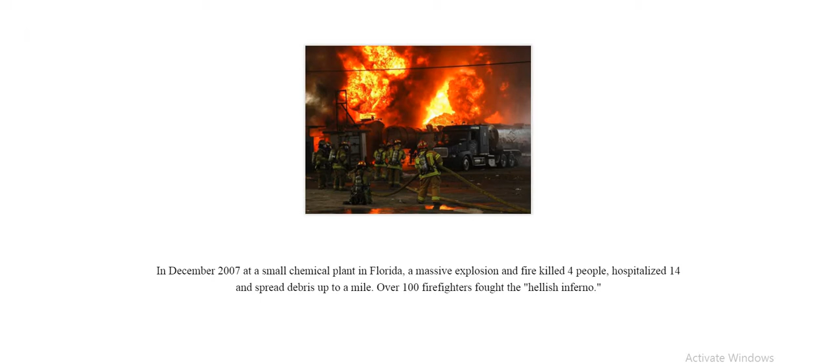In December 2007, at a small chemical plant in Florida, a massive explosion and fire killed 4 people, hospitalized 14, and spread debris up to a mile. Over 100 firefighters fought the hellish inferno.

On February 16, 2007, a massive fire broke out at a refinery in Texas, leaving 3 workers seriously burned and 11 with minor injuries.

In April 2010, an explosion on the drilling rig off the Louisiana coast killed 11 workers, injured 16 others, and caused a massive offshore oil spill in the Gulf of Mexico.

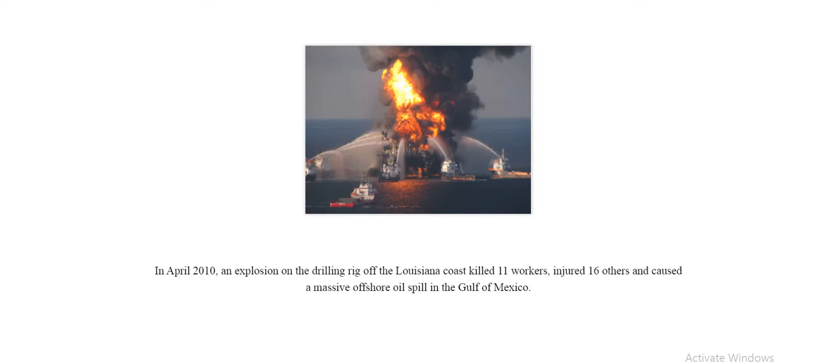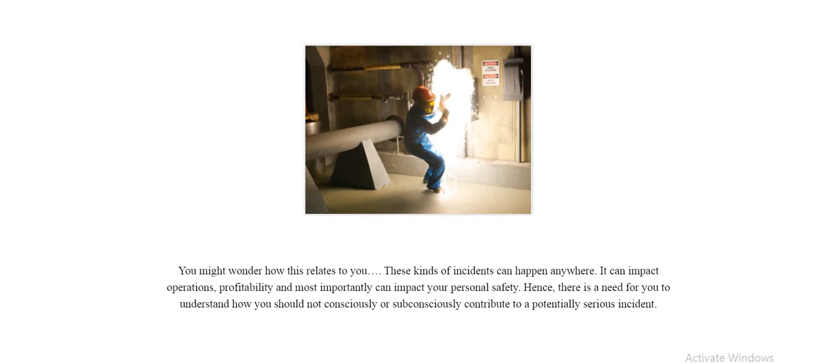You might wonder how this relates to you. These kinds of incidents can happen anywhere. It can impact operations, profitability, and most importantly, can impact your personal safety. Hence, there is a need for you to understand how you should not consciously or subconsciously contribute to a potentially serious incident.

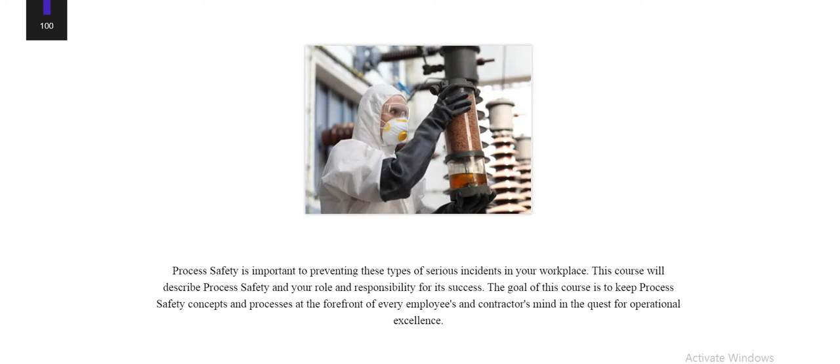Process safety is important to preventing these types of serious incidents in your workplace. This course will describe process safety and your role and responsibility for its success. The goal of this course is to keep process safety concepts and processes at the forefront of every employee's and contractor's mind in the quest for operational excellence.

The first section, Rationale for Process Safety, describes what it is, why it's important, the benefits of process safety, and how leadership commitment is critical to its success.

In the next section, we will discuss 3 major components of process safety: technology, facilities, and personnel. We will also discuss the 14 elements of process safety that ensure all safety facets are considered for every process.

In the next section, What can you do? Your responsibilities regarding process safety and what it means to maintain operational discipline will be explained.

In the last section, we'll explore what happened in the refinery fire, what process safety standards were not applied, and how the incident could have been prevented in the first place.

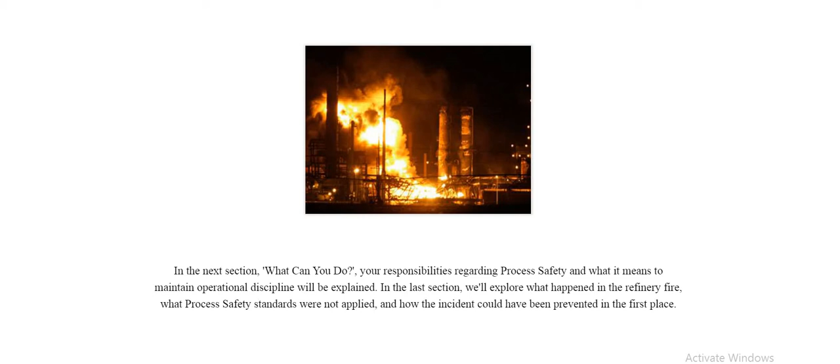At the conclusion of this course, you will be able to define process safety, recognize its significance, describe the components of the process, and identify employee and contractor roles and responsibilities for its success.

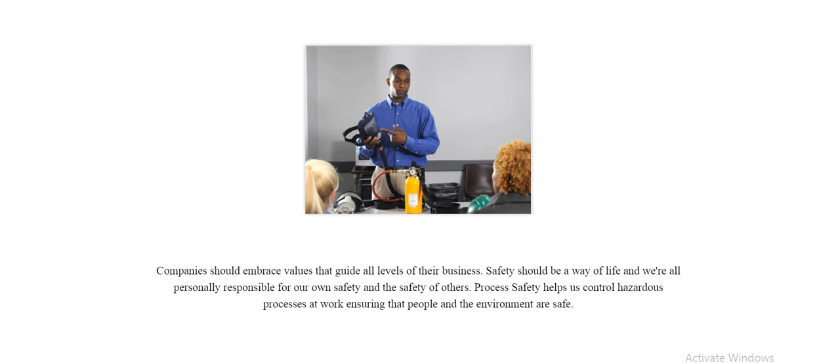Companies should embrace values that guide all levels of their business. Safety should be a way of life, and we are all personally responsible for our own safety and the safety of others. Process safety helps us control hazardous processes at work, ensuring that people and the environment are safe.

Why is process safety important? Companies throughout the world are being held legally accountable for effects of process incidents. It's easy to see that employees, the public, property, and the environment are greatly affected by catastrophic incidents. Most process incidents can be traced to breakdowns in management systems or controls.

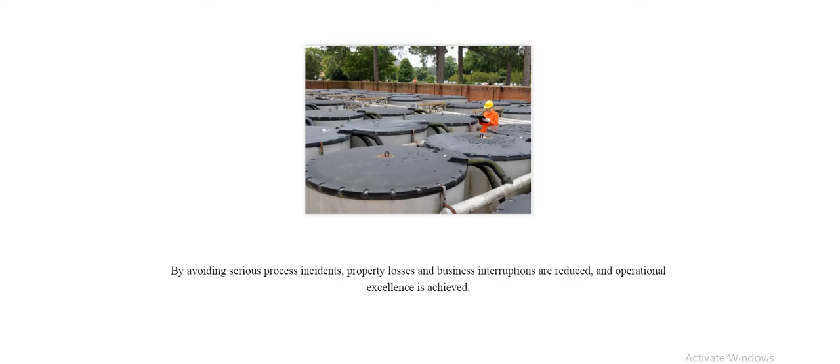By avoiding serious process incidents, property losses and business interruptions are reduced, and operational excellence is achieved. Process safety is good for business.

Process safety helps improve productivity and reduce downtime, improve quality and customer satisfaction, protect our corporate reputation, and sustain our license to operate.

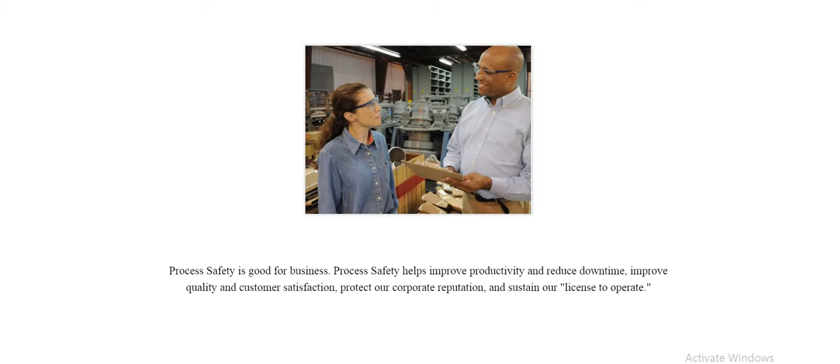Every company wants all work processes and systems to be safe. Process safety helps do that. We use process safety to identify and control process hazards at work, and to prevent serious incidents, death, and injury. It is expected that every employee and contractor be personally responsible for process safety.

PSM aims to achieve operational excellence in safety by living out safety values, which are: all incidents can be prevented. Safety is a critical part of a company's culture. It's how business is done. Each employee is accountable for achieving results the right way, safely.

This means all employees protect the safety and health of our team members and environment, as well as conduct our operations reliably and efficiently. Companies will only accomplish world-class performance when they consistently manage safety, health, environment, reliability, and efficiency within the organization.

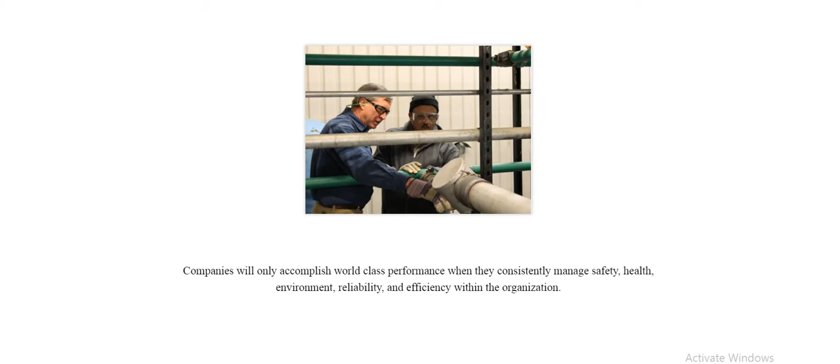Process safety is achieved when each of us does our part with every task, doing the right thing the first time, every time. Let's take a closer look at the components of process safety.

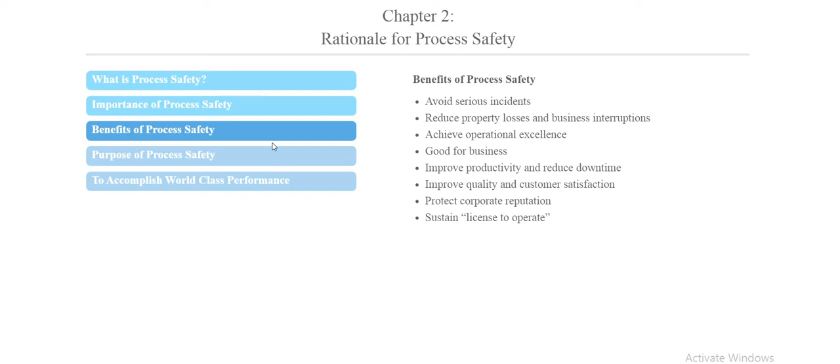Who is responsible for your safety and the safety of others? A. No one. B. Co-workers. C. Everyone. D. Management.

Which of the following is a benefit of process safety? A. Reducing property losses and business interruptions. B. Weakening customer satisfaction. C. Increasing serious incidents. D. Increased downtime and reduced productivity.

Consistently managing safety, health, environment, reliability, and efficiency within an organization will: A. Result in organizational bankruptcy. B. Result in massive employee terminations. C. Help accomplish world-class performance. D. Help sustain high employee turnover rates.

You passed. Good job.

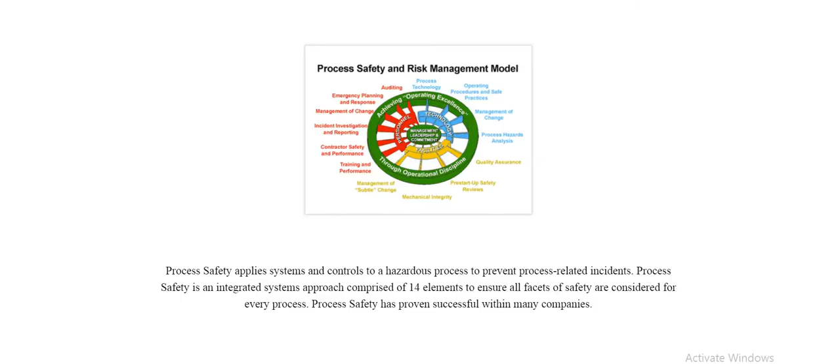The core of the model is management and leadership commitment, which supports the 3 main components: personnel, working with technology in our facilities to achieve excellence through operational discipline.

Leadership and visible commitment from management is at the core of every successful process safety program. That means every manager, starting with senior management down through every level of the company, actively supports and reinforces the mindset of safety. The line organization must be committed to establish both organizational and individual safety objectives, and to assure facilities are operated within established policies, practices, and procedures.

Site management plays an important role and is accountable to establish and sustain a safety culture, PSM expectations, accountabilities and objectives, resourcing, providing reward and recognition, and measuring performance.

In addition, site management is responsible for demonstrating leadership, commitment, and personal involvement, designating a site PSM leader and PSM committee, and encouraging employee participation in safety activities, driving performance improvement by routinely reviewing and responding to the site program of leading and lagging indicators and performance metrics.

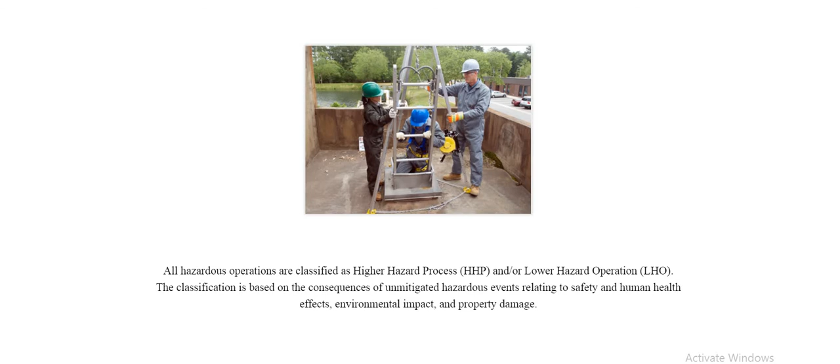All hazardous operations are classified as higher hazard process, HHP, and/or lower hazard operation, LHO. The classification is based on the consequences of unmitigated hazardous events relating to safety and human health effects, environmental impact, and property damage.

A higher hazard process is any activity manufacturing, handling, storing, or using a hazardous substance that when released, ignited, or energy released, can result in death or major irreversible human health effects, significant property or environmental impact, or off-site impacts due to acute toxicity, flammability, corrosiveness, thermal instability, or reactivity.

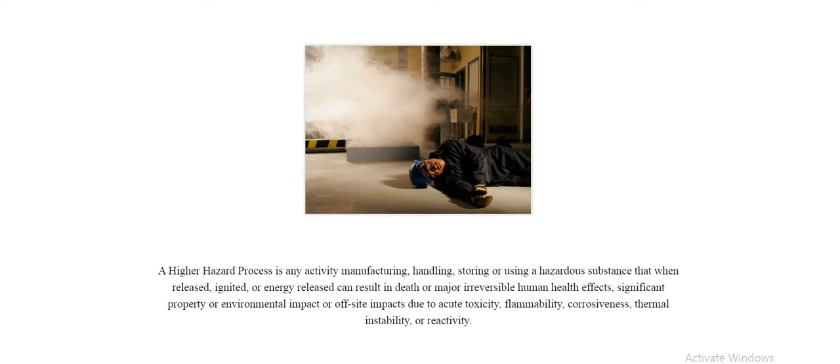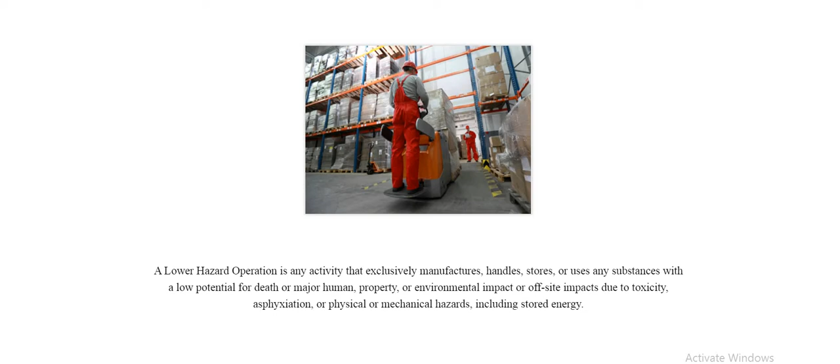A lower hazard operation is any activity that exclusively manufactures, handles, stores, or uses any substances with a low potential for death or major human, property, or environmental impact, or off-site impacts due to toxicity, asphyxiation, or physical or mechanical hazards, including stored energy.

For HHPs, all of the PSM requirements apply. For LHOs, the PSM requirements are less stringent. For example, in an LHO, there are no requirements for cyclical PHAs. The difference between HHPs and LHOs can be consequence-based or prescriptive-based. Prescriptive-based includes highly toxic materials, steam generation and related combustion, explosives, reactive hazards.

It's time for a quick review. You'll have 2 chances to correctly answer the questions that follow, so take a look at the content outline and select the topic you want to review. Select the forward arrow when you're ready to continue.

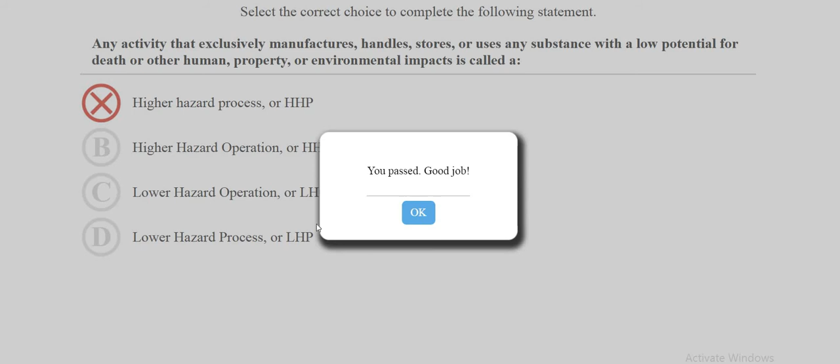We've discussed the core of the PSM model, leadership and commitment. Next, we'll look at the three major PSM components: technology of the process, facilities to manufacture and handle the hazardous material, and personnel who operate, maintain, and support the process. These three components include the 14 elements needed to manage process-related hazards.

The technology component of PSM addresses four areas: process technology, or PT, process hazards analysis, or PHA, management of change technology, or MOCT, operating procedures and safe work practices, or OP and SWP.

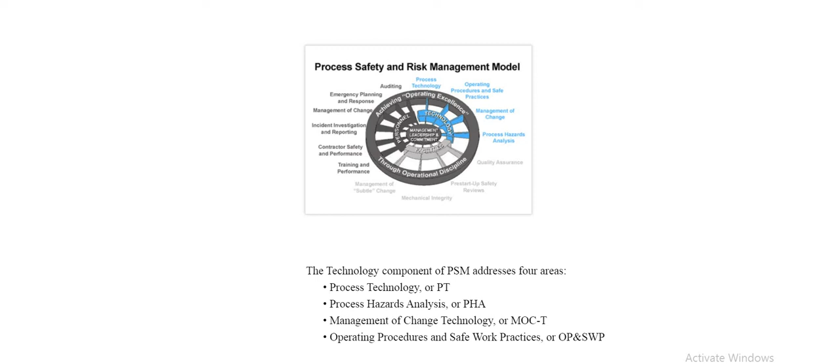The Process Technology Package, formerly called Process Safety Information, provides a description of the operation or process. It provides the foundation for identifying and understanding the hazards involved. This is the first step in the PSM effort. The PT package consists of four parts: hazards of the process, process design basis, equipment design basis, identification of PSM critical equipment.

Process hazards analysis is used to identify, evaluate, and develop methods to control significant hazards. These hazards generally represent the potential for fires, explosions, chemical reactivity, and/or release of toxic materials. PHAs use an organized, methodical study approach, seek to achieve a multidisciplinary consensus on hazard identification and control, and document results for future follow-up, emergency planning, and training involved in operating and maintaining the operation.

The operating procedures provide a clear understanding of and instructions on the detailed operating parameters and limits for safe operation. It also explains the safety, health, and environmental consequences of operation outside process limits and describes specific steps to be taken to correct and/or avoid deviations.

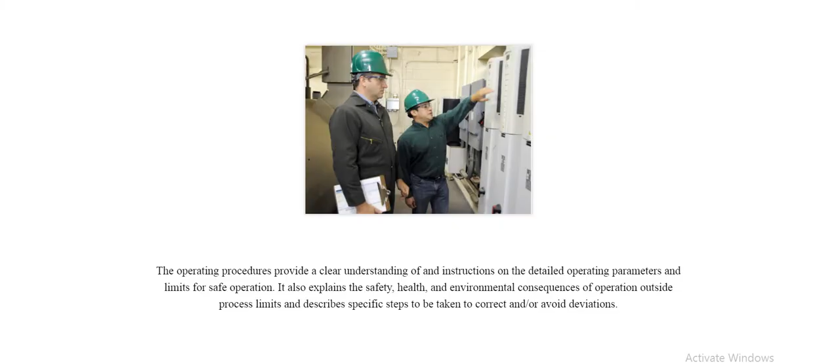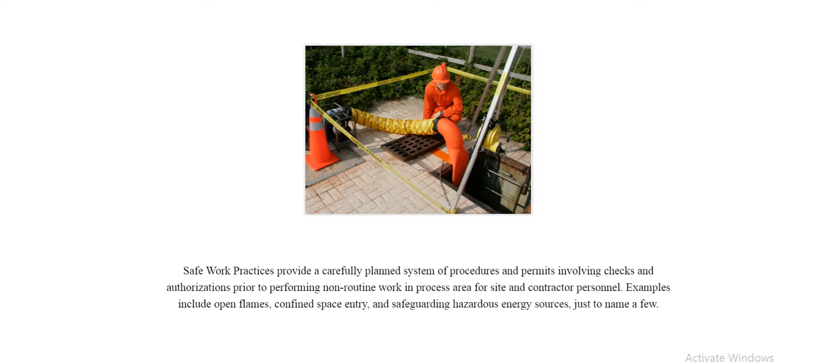Safe work practices provide a carefully planned system of procedures and permits involving checks and authorizations prior to performing non-routine work in process area for site and contractor personnel. Examples include open flames, confined space entry, and safeguarding hazardous energy sources, just to name a few.

All changes to the documented process technology are subject to the same rigorous safety review as new processes. The change may require a complete PHA or subset of a PHA. Changes include new or modified equipment installations or configurations, changes to the design basis for existing equipment, changes in process materials or operating parameters, tests of new materials of construction, process control changes, and modifications that impact or alter existing protective systems.

The purpose of the facilities component is to ensure that integrity is maintained of assets with a high degree of rigor and quality throughout the design, build, commission, and operate phases. Process safety applies to new capital projects as well as existing operations. The facilities component has four elements: quality assurance, pre-startup safety review, mechanical integrity, and management of change facilities.

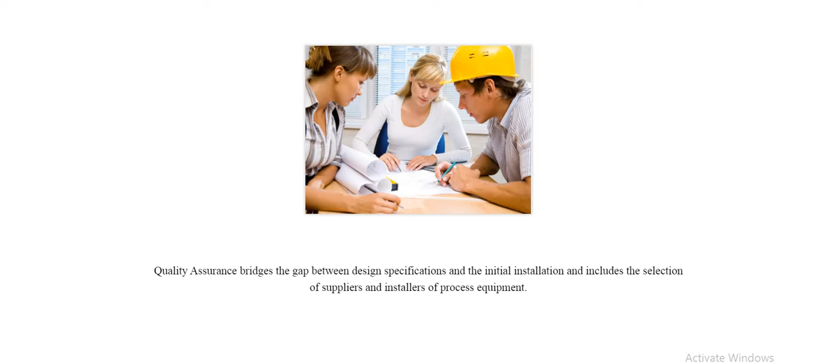Quality assurance bridges the gap between design specifications and the initial installation and includes the selection of suppliers and installers of process equipment. QA helps verify that process equipment meets the following standards. 1. Fabricated in accordance with design specifications. 2. Shipped and delivered to the proper location in good condition. 3. Stored, assembled, and installed properly on site.

Pre-startup safety reviews, or PSSR, provide a final check of new and modified equipment to confirm that all appropriate elements of process safety are satisfactorily addressed and the facility is safe to start up.

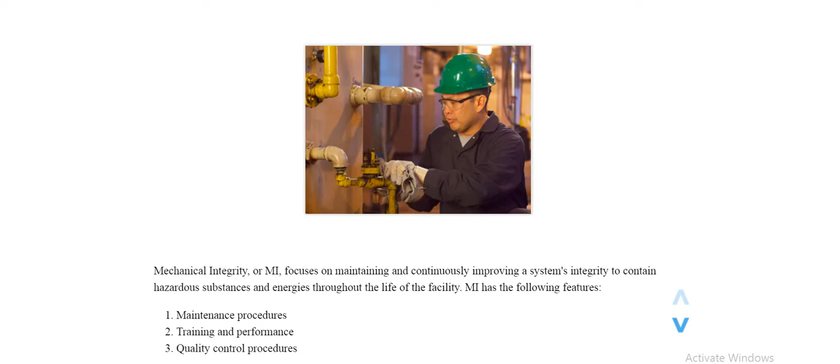Mechanical integrity, or MI, focuses on maintaining and continuously improving a system's integrity to contain hazardous substances and energies throughout the life of the facility. MI has the following features: 1. Maintenance procedures. 2. Training and performance. 3. Quality control procedures. 4. Equipment inspections and tests. 5. Repairs and changes. 6. Reliability engineering analysis. 7. Equipment budgetary processes.

Management of change facilities addresses subtle or minor changes to process equipment and facilities. All changes, including those within the documented technology that are not replacement in kind, as well as temporary in-service repairs that are actually changes, should go through appropriate review and authorization. Some examples of facility changes that are subtle or minor are rerouting a piping system and temporary leak repairs and patches, just to name a few.

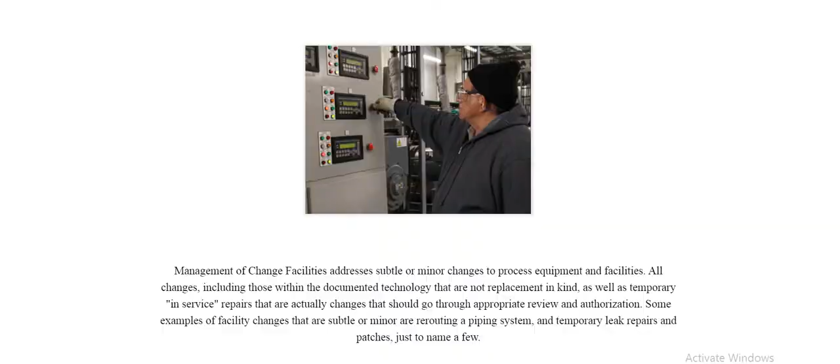The personnel component ensures that personnel have the skills, competency, knowledge, and operational discipline necessary to operate the facilities and technology. This includes ensuring that personnel have good process safety knowledge at all levels of the organization. The personnel component includes 6 elements: personnel training and performance, contractor safety and performance, incident investigation, management of change personnel, emergency planning and response, and auditing.

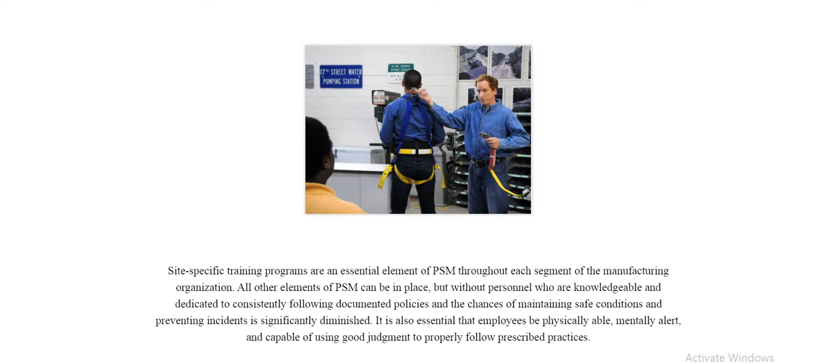Site-specific training programs are an essential element of PSM throughout each segment of the manufacturing organization. All other elements of PSM can be in place, but without personnel who are knowledgeable and dedicated to consistently following documented policies, the chances of maintaining safe conditions and preventing incidents are significantly diminished. It is also essential that employees be physically able, mentally alert, and capable of using good judgment to properly follow prescribed practices.

The key components of personnel training and performance are basic and refresher training, job task training, fitness for duty, dealing with diminished capacity, and fatigue risk management system.

Whether completed by site employees or by contract employees, it is essential that all tasks involving high hazard processes and PSM critical equipment be completed safely in accordance with established procedures and/or safe work practices, and be consistent with the principles and essential features of PSM.

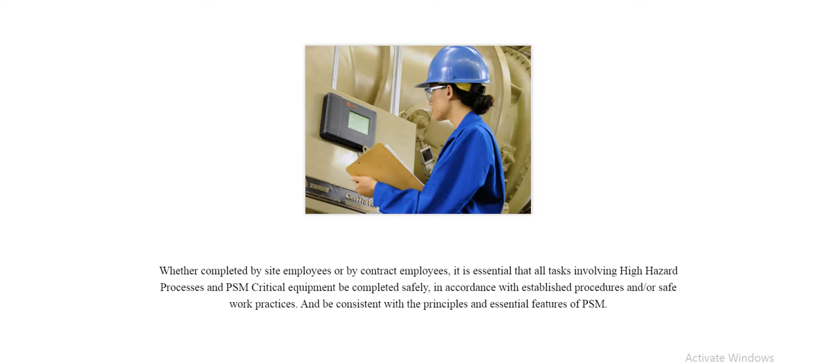Examples of some key essential features of contractor safety and performance include evaluation of contractor safety performance as part of the selection process, establishing clear lines of communication, informing contractor of known hazards, informing contractor of safety rules and procedures, periodical evaluation of contractor performance.

Process-related incidents, including near misses, may recur unless key factors are identified and corrected. Thorough and persistent reporting and investigation of process-related and near-miss incidents, coupled with actions directed at prevention of recurrence, continually improve process safety. All incidents are reported and investigated, including near misses. Root causes are determined, recommendations are developed, and corrective actions taken.

The management of change personnel element is an essential ingredient that is interwoven through all of the elements of PSM because it relates to people. It is important to maintain a minimum level of specific direct process experience and knowledge and skill in managing process safety within the site line and support organizations. Loss of minimum levels of experience and knowledge through personnel movements and organizational change, like changes to technology or facilities, potentially invalidates prior hazard assessments.

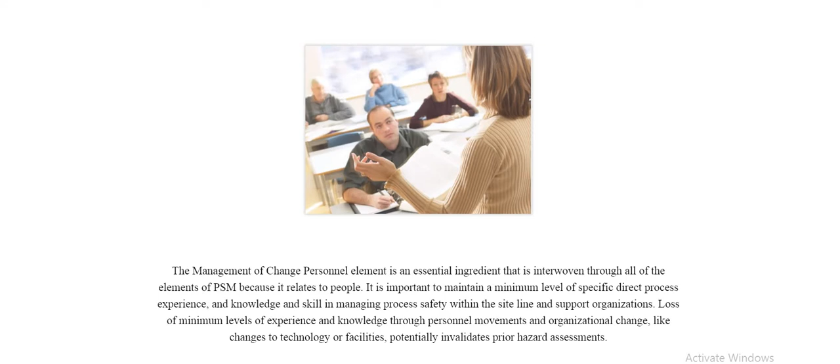Essential features of management of change personnel handled by sites are to develop and implement criteria and guidelines regarding MOCP, ensure minimum levels of specific, direct process experience are maintained, ensure minimum levels of staffing, knowledge, and skill are maintained in vital PSM roles. Access to external support, including contractors and consultants, can also be considered.

Emergency planning and response for potential emergencies is essential for an effective response by site personnel, working in close conjunction with supporting community emergency response organizations. The result of emergency planning is mitigation of the impact on personnel, environment, and facilities, and prompt control of the emergency. Essential features of emergency planning and response are a written response plan based on hazards and consequence, a plan that addresses a range of releases from small to large, training for site personnel based on their role, emergency response drills.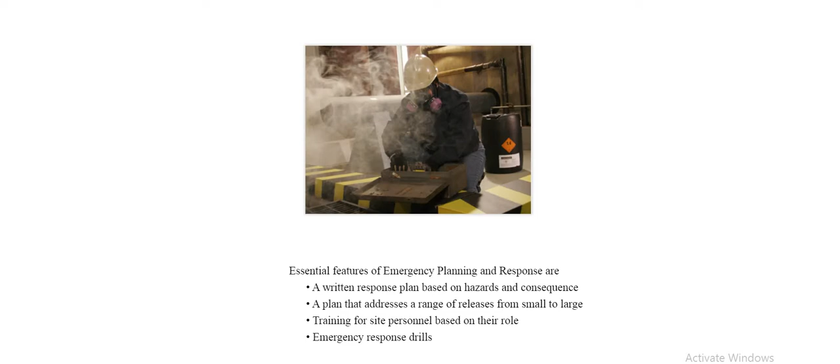Auditing is a key tool in the establishment, measurement, maintenance, and continuous improvement of process safety performance. Audits compare performance against established standards. Proper auditing provides a process that reinforces correct systems, behaviors, and work practices, while identifying opportunities for improvement. Active participation by site personnel throughout the line management, with appropriate technical expertise and experience, is also important.

It's time for a quick review. You'll have 2 chances to correctly answer the questions that follow, so take a look at the content outline and select the topic you want to review. Select the forward arrow when you're ready to continue.

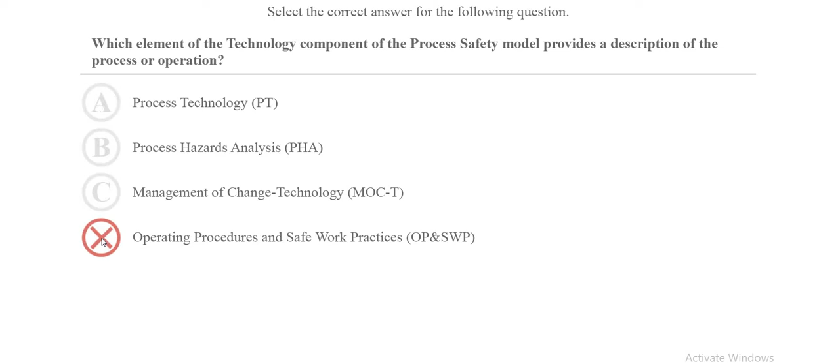Pre-startup safety reviews, PSSR. A. Bridge the gap between design specifications and initial installation. B. Maintain and continuously improve a system's integrity. C. Provide a final check of new and modified equipment. D. Address subtle or minor changes to process equipment and facilities.

Which element of the people component of the process safety model is directed at preventing a recurrence of a real or near-miss incident? A. Auditing. B. Contractor safety. C. Incident investigation. D. Management of change personnel. You passed. Good job.

We believe that all injuries and occupational illnesses, as well as safety and environmental incidents, are preventable, and our goal for all of them is zero. We will promote off-the-job safety for our employees. We will assess the environmental impact for each facility we propose to construct or acquire, and will design, build, operate, and maintain all of our facilities and transportation equipment so they are safe, secure, and acceptable to local communities, and protect the environment. We will be prepared for emergencies and will provide leadership to assist our local communities to improve their emergency preparedness.

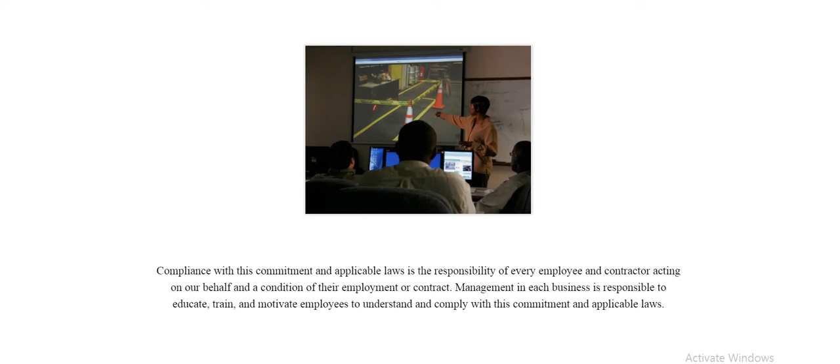Compliance with this commitment and applicable laws is the responsibility of every employee and contractor acting on our behalf, and a condition of their employment or contract. Management in each business is responsible to educate, train, and motivate employees to understand and comply with this commitment and applicable laws.

As an employee or contractor involved in hazardous operations, you are responsible for the following. Make sure you have skill and knowledge in the process, including specific environmental, health, and safety hazards. Attend training related to your job's hazardous process. Follow operating procedures and safe work practices applicable to your tasks.

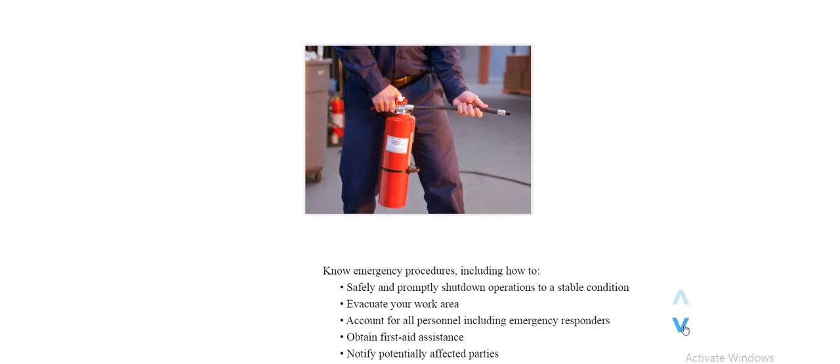Know emergency procedures, including how to safely and promptly shut down operations to a stable condition. Evacuate your work area. Account for all personnel, including emergency responders. Obtain first aid assistance. Notify potentially affected parties. Coordinate with site and local emergency response groups.

Be prepared to respond in an emergency. Know the emergency procedures specific to your work assignment and how you should respond. Make sure you know what alarm signals require action on your part. Know how to report an actual or potential emergency situation and your reporting responsibilities.

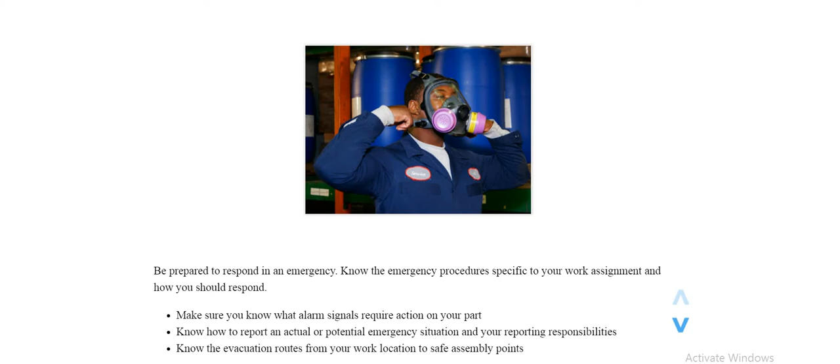Know the evacuation routes from your work location to safe assembly points. Make sure you can properly use any personal protective equipment needed. Participate in emergency response drills or training. Participate in incident investigations as needed, whether as a witness or as a member of the investigation team.

Immediately report to your supervisor any actual or potential process safety issues, such as leaks, spills, releases, mechanical integrity problems, or any other issue that could potentially lead to any type of process safety incident. Be involved, as needed, in audits, pre-startup safety reviews, quality control reviews, or other process safety activities.

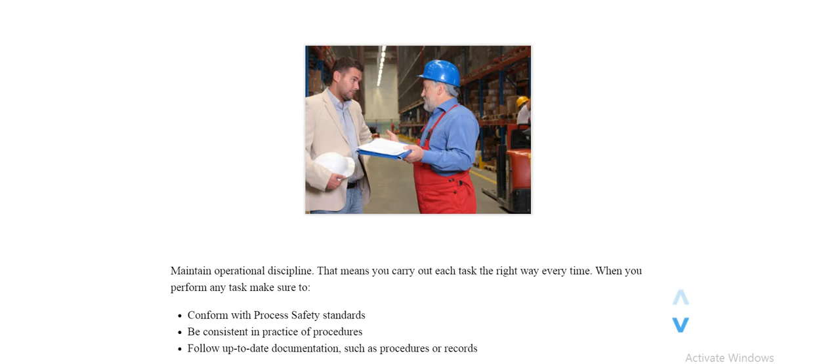Maintain operational discipline. That means you carry out each task the right way every time. When you perform any task, make sure to conform with process safety standards. Be consistent in practice of procedures. Follow up-to-date documentation, such as procedures or records. Avoid shortcuts or workarounds. Maintain excellent housekeeping. Apply lessons learned from previous incidents. Communicate with others as needed.

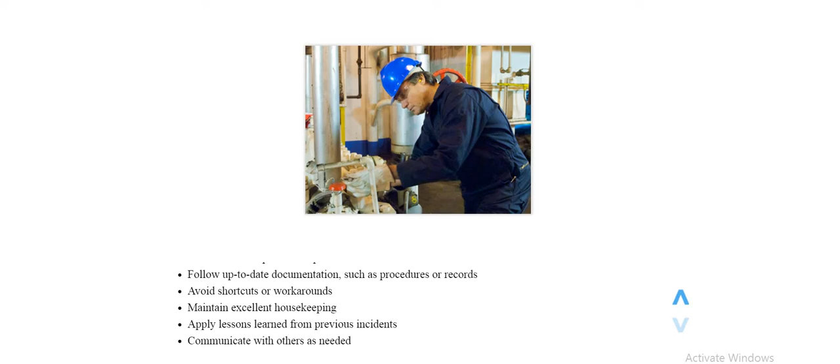To encourage operational discipline, the company should provide sufficient resources to support safety programs, require employee involvement, advocate strong teamwork and networks, promote common shared values, conduct safety audits. A well-managed process safety system results in a clean, safe, and reliable operation, and together with operational discipline, leads to operational excellence.

It's time for a quick review. You'll have 2 chances to correctly answer the questions that follow, so take a look at the content outline and select the topic you want to review. Select the forward arrow when you're ready to continue.

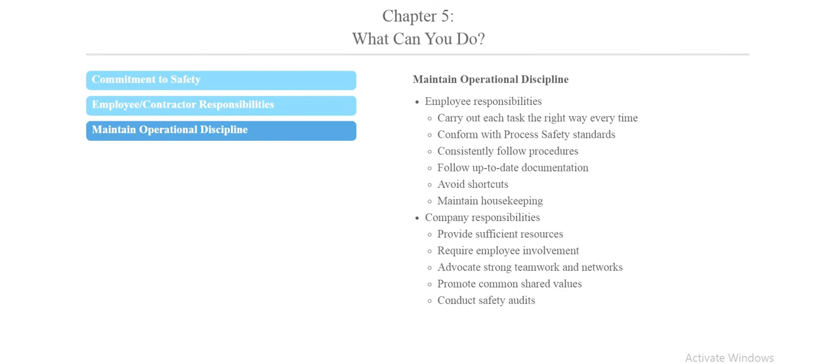What is meant by operational discipline? A. Carrying out each task the right way every time. B. Ensuring you are informed on how to operate every piece of equipment, regardless of whether or not you actually work on it. C. Executing shortcuts to improve productivity levels. D. Ignore process safety standards and protocols. You passed. Good job.

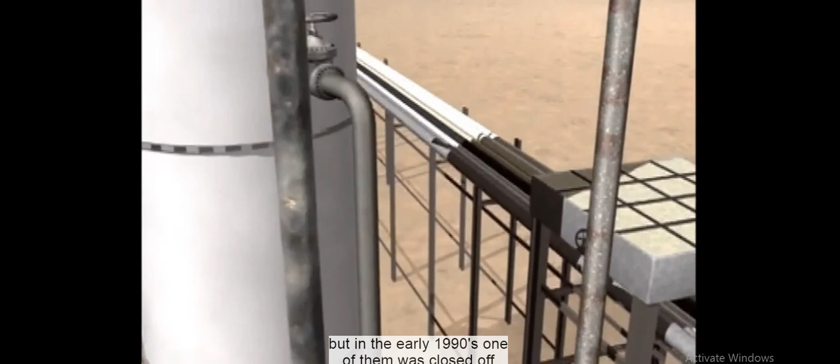Here's what most likely happened. High-pressure liquid propane used to separate asphalt and gas oil flowed through a control station up to an extraction tower. Originally, there were 2 control stations, but in the early 1990s, one of them was closed off using several valves, creating a dead leg or unused piping.

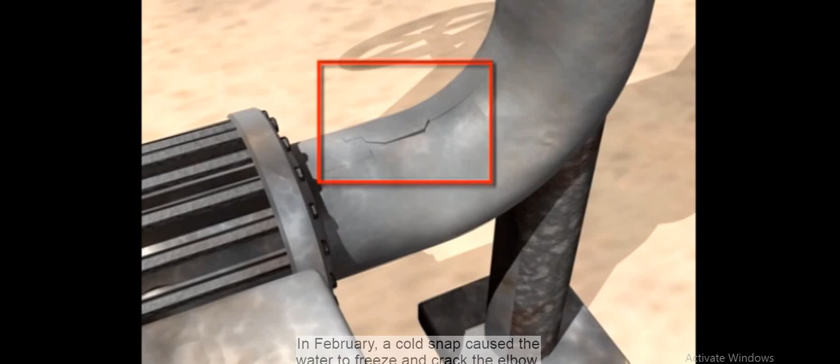At some point, a foreign object, a piece of metal, wedged under one of the valves, leaving a path for liquid to seep past. Small amounts of water from the propane sank through the valve, accumulating in the pipe elbow below. In February, a cold snap caused the water to freeze and crack the elbow. When the ice began to thaw, propane escaped through the cracked pipe.

A large flammable vapor cloud formed, was windblown to a boiler house, and ignited. Flames flashed back to the cracked pipe, forming a high-pressure jet fire. Nearby pipes were quickly damaged, causing a second jet fire, aimed at a non-fireproof steel support structure. In minutes, the steel structure collapsed, breaking open many lines of flammable material and spreading the fire.

Emergency responders could not turn on stationary fire water monitors due to shifting winds. Within 15 minutes, the refinery was evacuated. Could this fire have been prevented? Investigators think so. Let's look at the process safety elements that were compromised. The incident began in a dead leg or unused piping. A management of change review was not conducted to safely remove the piping from service.

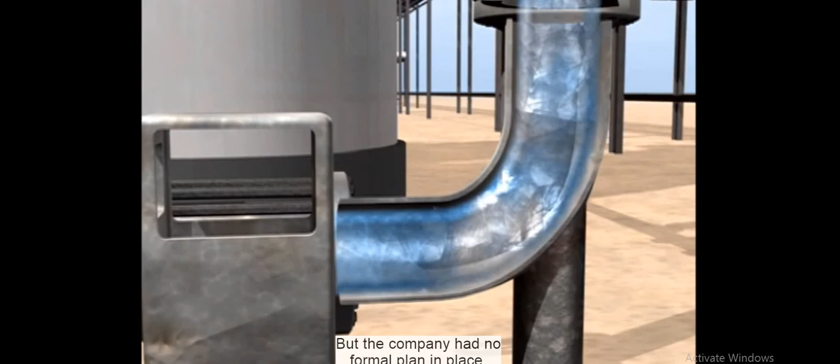Freeze protection of piping could have prevented the incident, but the company had no formal plan in place—a failure in process hazard analysis. First responders were not able to reach shutoff valves due to the fire. The company's process hazard analysis called for remotely operated shutoff valves, which were never installed into the deasphalting unit. A breakdown in operating discipline ended in disaster.

A non-fireproofed support structure gave way in the fire's heat—a failure in process hazard analysis. Two near misses were identified due to failures in process hazard analysis.

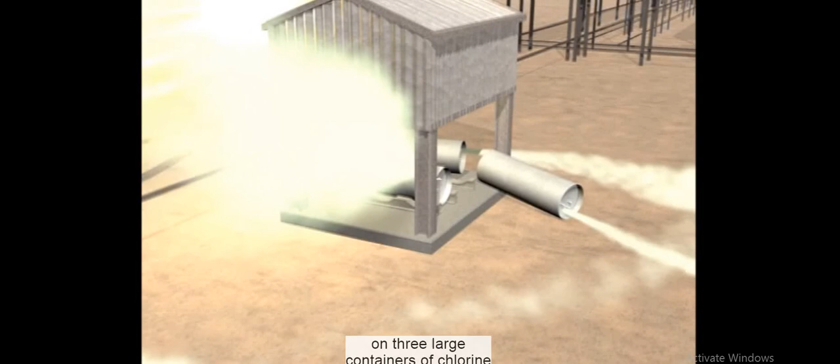Toxic chlorine gas was released into the air when the intense heat melted the plugs on three large containers of chlorine stored near the de-asphalt unit. Fortunately, all responders had been evacuated beforehand.

One of the four large tanks filled with liquefied petroleum gas was exposed to heat from the fire, its paint blistering. The tank could not be cooled since the valve to turn on the water deluge system was too close to the raging fire.

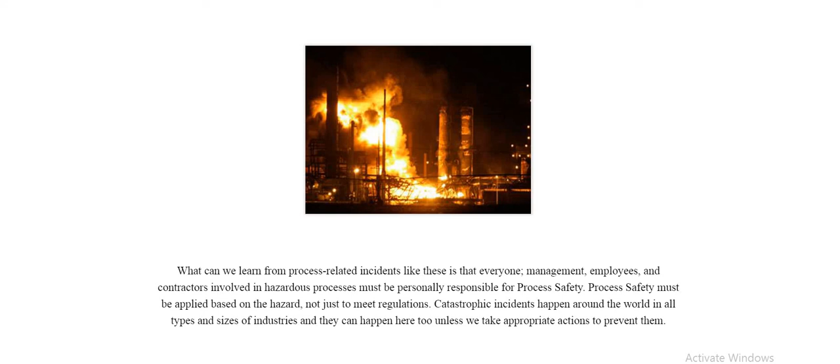What can we learn from process-related incidents like these? Everyone—management, employees, and contractors involved in hazardous processes—must be personally responsible for process safety. Process safety must be applied based on the hazard, not just to meet regulations.

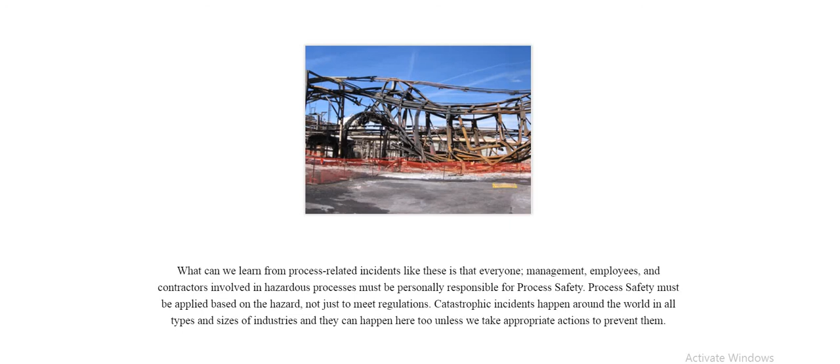Catastrophic incidents happen around the world, in all types and sizes of industries, and they can happen here too, unless we take appropriate actions to prevent them.

Everyone is accountable for process safety. What you do counts. Discipline yourself to work safely every time. Make sure you have the skills, competency, and knowledge you need to work safely. Adopt the process safety approach to your work here. Live safety every day. Working together, we can prevent catastrophic incidents and keep our families and community safe.

Before we move forward to the comprehensive test, take this opportunity to review the main points covered in this course. Select the chapter you'd like to review from the content outline on the left side of the screen. When you're ready to take the comprehensive test, select the Test button.

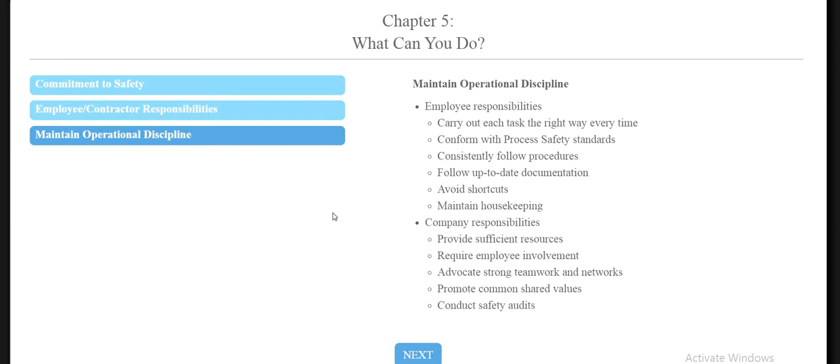Process safety helps control: A. The use of personal protective equipment. B. The number of hours worked by regular full-time employees. C. How many sick days are processed in a given area. D. Hazardous processes to keep people safe.

One of the benefits of process safety is: A. Eliminating license to operate. B. Avoiding serious incidents. C. Increasing customer dissatisfaction. D. Increased injury and incident rates.

Consistently managing safety, health, environment, reliability, and efficiency within an organization will: A. Result in organizational bankruptcy. B. Result in massive employee terminations. C. Help accomplish world-class performance. D. Help sustain high employee turnover rates.

At the core of the process safety atom is: A. Technology. B. Facilities. C. Management leadership and commitment. D. People.

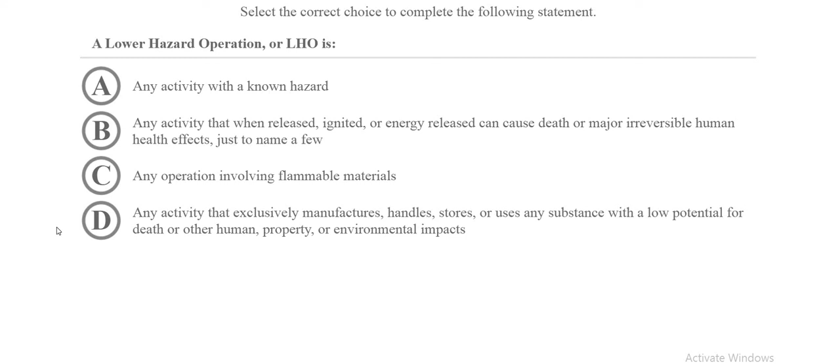Which of the following elements within the technology component is used to identify, evaluate, and control significant hazards? A. Management of Change Technology, MOCT. B. Process Hazards Analysis, PHA. C. Operating Procedures and Safe Work Practices, OP and SWP. D. Process Technology, PT.

Which element of the facilities component bridges the gap between design specifications and initial installation? A. Pre-startup safety reviews, PSSR. B. Quality assurance, QA. C. Mechanical integrity, MI. D. Management of change, facilities.

The people component of the process safety model: A. Ensures that personnel have the skills, competency, knowledge, and operational discipline necessary. B. Insists that everyone possess at least a 4-year bachelor's degree. C. Requires everyone to be at least 5 feet tall to operate in our facilities. D. Demands that everyone be on a first-name basis with each other.

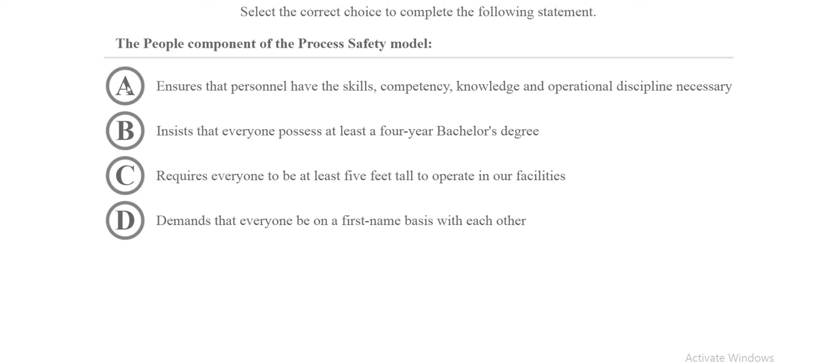One process safety responsibility for all employees is to: A. Ignore requests to participate in audits, PSSRs, and quality control reviews. B. Know evacuation routes and procedures for your facility. C. Hone responsibility for safety on yourself only—let others worry about their own safety. D. Only attend after-hour training sessions.

One way the company encourages operational discipline is to: A. Emphasize consistent productivity over safety. B. Discourage teamwork to avoid distractions on the job. C. Offer overnight flex hours to those who want it. D. Provide sufficient resources to support safety programs.